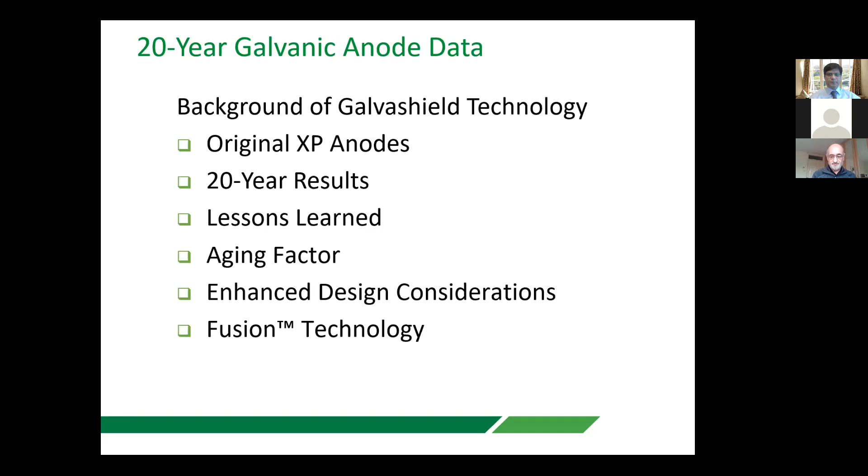So, corrosion prevention is basically to prevent corrosion from initiating, rather than stopping it after it's started. There's no existing criterion for that in the standards, although we've been looking at that. We are actually looking at EN 12696 recently to try and deal with that necessity. But there isn't any standard at the moment.

The only thing that is mentioned in the standard is that the current density necessary to prevent corrosion from initiating is between 0.4 and 2 milliamps per meter squared. And that is much lower than the level required to stop ongoing corrosion activity. And that's more like 2 to 20 milliamps per meter squared. So it's an order of magnitude lower current requirement.

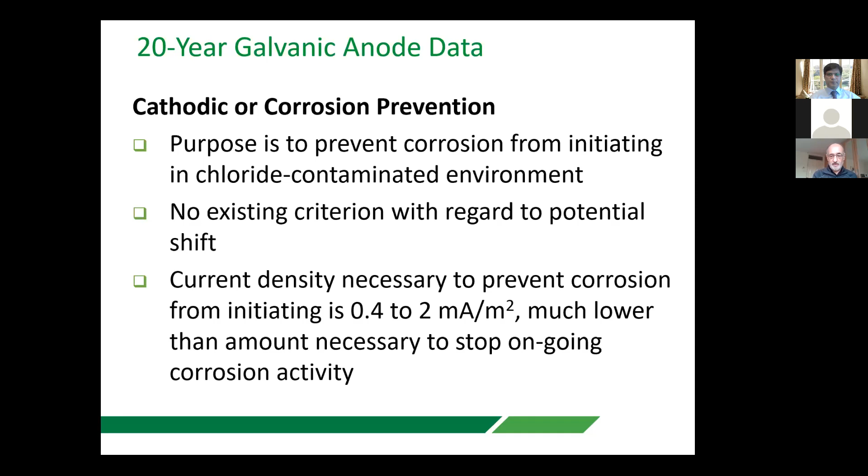Now, why am I talking about corrosion prevention? Well, one of the initial problems that people who are repairing concrete construction were finding was that when they carried out a repair, a patch repair, i.e. remove any cracked concrete, remove contaminated concrete around the steel, that would make a very good repair, and it looked wonderful. But corrosion would initiate at the periphery of the patch repair very quickly. 2 to 5 years later, they would have to come back and repair the adjacent area. And therefore that meant that they were sort of chasing their repairs. You can have one patch repair, then you move along to the next bit and the next bit and the next bit.

Obviously there was a problem. There was something that was happening that wasn't stopping the corrosion close to the patch repair, not in the patch repair itself. And that's the problem that FOSROC came to us with when I was at Aston University, saying, well, we've got an issue with our patch repairs. We think our materials are very good, but a few years down the line, we have to go back and reapply patch repair to adjacent areas.

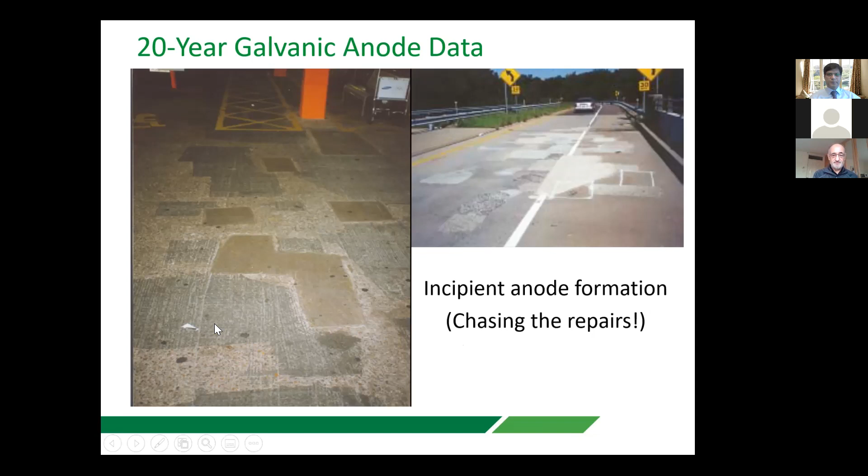And we came up with the solution. Well, first of all, we tried to understand the issue, and what was actually happening was when you carry out a patch repair, you have now forced the steel within the patch repair to become the cathode, being the area that's non-corroding, but drives the anode, being the area that is corroding. So initially, what was within the patch was the anode, and therefore the corroding region. So steel was corroding. We now fixed that. We forced it to become a cathode, I beg your pardon, which means that any slight contamination of the periphery, of chlorides perhaps, or carbonation, or a change in pH in the concrete, would force the surrounding steel to become anodic and therefore start to corrode. And that was basically the principle.

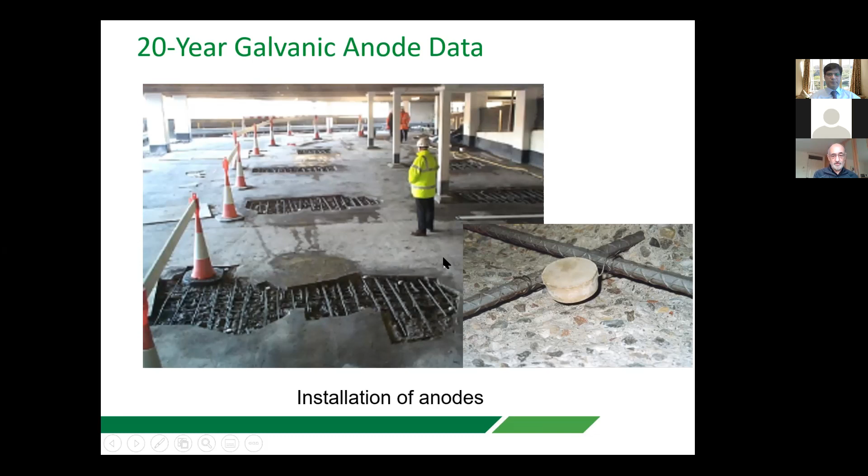It's now called the ring effect. It's been known for many, many years. And our solution was to attach this type of anodes around the periphery in order to maintain that region inside the patch repair as cathodic. So the anodic areas are now these little anodes. They're the bits that are corroding sacrificially, and they protect the surrounding region, particularly the periphery of the patch repair.

But there had to be a bit of development to try and convince the zinc that we were using as the core material. Zinc is obviously more electronegative than steel, and therefore will preferentially corrode if you couple it with steel. But the zinc needs to remain in an active condition. If you put zinc inside concrete at pH 12.5 or roughly that, you would see that it would start to passivate. It would form calcium zincate byproducts. And that would act as sort of a passivation layer on top of the zinc, and soon the corrosion of zinc would stop, and therefore you're not really protecting the steel reinforcement.

So we had to encase it in a cementitious material that will maintain the activity of the zinc. And the way we achieve that is to include a saturated amount of lithium hydroxide, i.e. lithium hydroxide powder mixed into the cementitious material that will maintain the pH well above 14, and it will keep it at a constant pH because it's a saturated solution. It means that it acts like a buffer, and therefore that will continually maintain the activity of the zinc product.

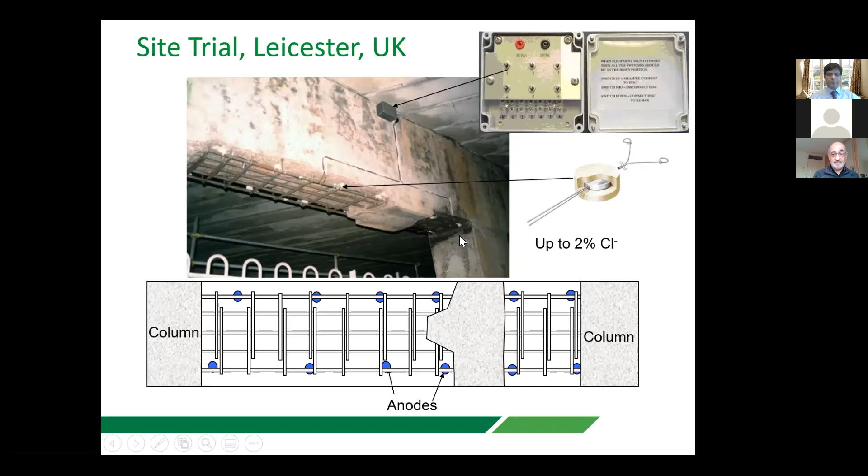and it was a typical patch repair in a bridge in Leicester in the UK. We removed 2 adjacent areas. We removed the cover concrete, exposed the steel that was corroding, and then attached 8 anodes around this area and 4 anodes around this area. As you notice, it's at the periphery of the patch.

But instead of connecting the anodes directly to the steel reinforcement, we took the connection into a junction box, connected the junction box to the steel reinforcement, and therefore we were able to turn on and off the galvanic anodes. That allowed us to measure the current that flowed between each individual anode and the steel. It also allowed us to turn off the system for 24 hours and watch how depolarization would develop over the time, and also look at the depolarized potential 24 hours after disconnection.

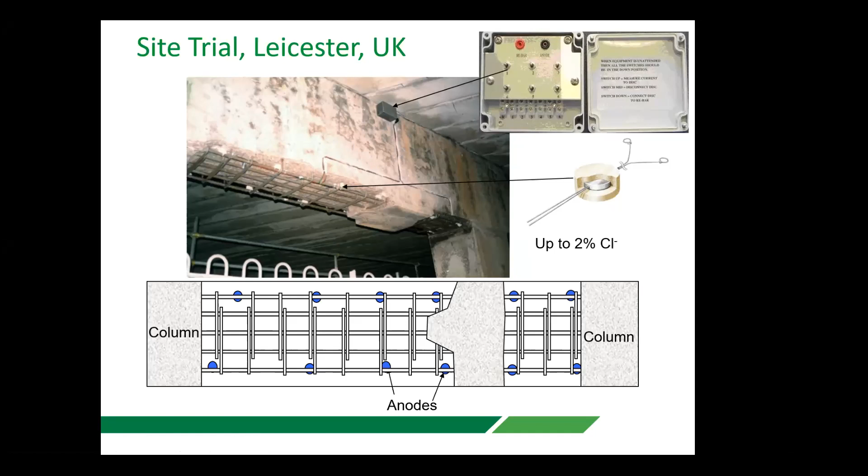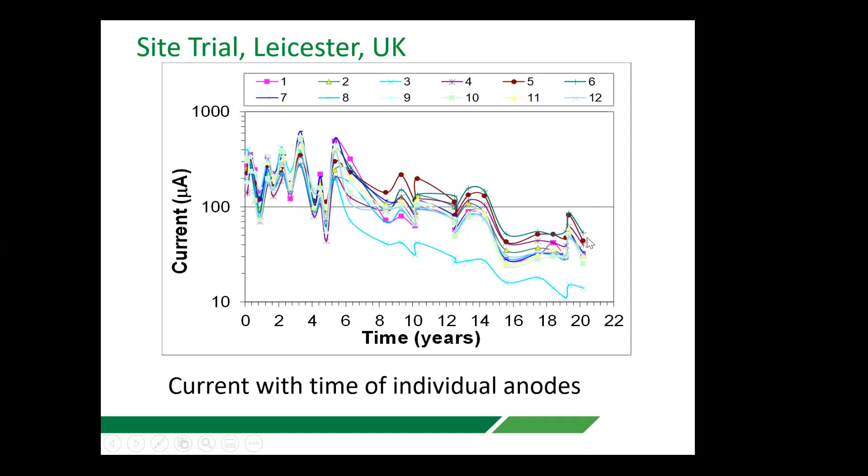And this is essentially the current output that we saw over the years of each individual anode. 12 anodes there. You can see that one of these is not particularly happy, but all the others are more or less diminishing in intensity with time. We looked at how much zinc we actually consumed over the time period. We did that both ways. I measured the amount of charge that was delivered by the individual anodes, used an efficiency factor of about 70%, and determined how much zinc was consumed using the Faraday equation. And we saw that after 20 years, we roughly used about 60% of the zinc within the individual anode.

You can see number 3, which is the one that was struggling. Then at 10 years, we actually took out some of the anodes, not in fact the ones within the monitored area, but there were adjacent patch areas that we installed at the same time. We took one anode out to have a look and see how it was consumed. And we could see that the consumption was relatively smooth. You lost zinc. That was the original zinc outline. The space between that was

evacuated, if you like, by the zinc product, and was filled with corrosion products, primarily of zinc oxide. But we also noticed that the zinc oxide was able to migrate into the pore structure of the cementitious material, quite a long distance, particularly on this side where you had more of the corrosion, quite a distance into the encasing mortar. And that was what was actually being hoped for, because we know that zinc in a very high alkali environment, when it corrodes, the corrosion products remain soluble. They're zincate ions, and they're able to migrate within the pore structure. They then obviously, when supersaturation is exceeded, precipitate out as zinc oxide.

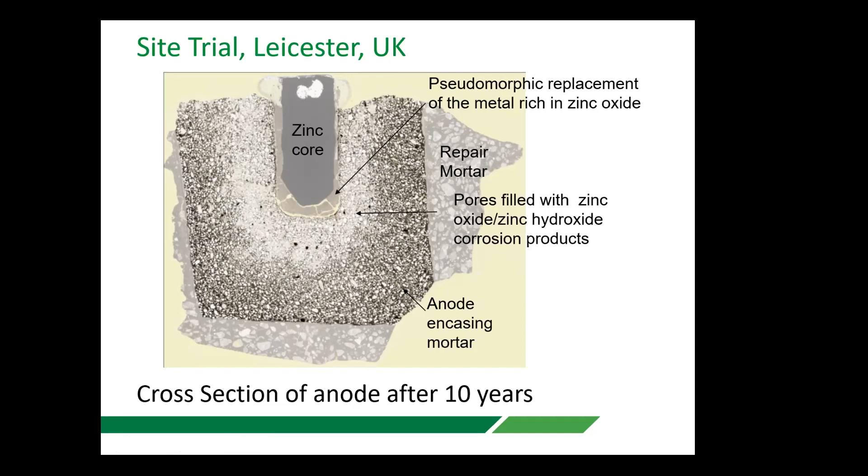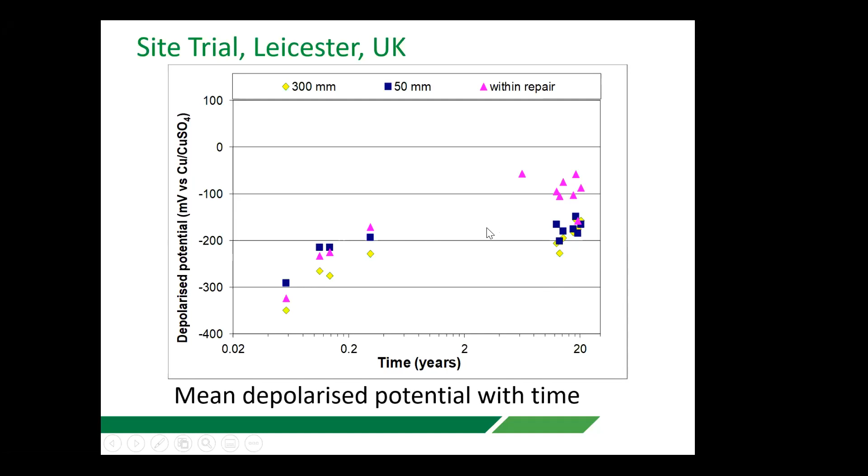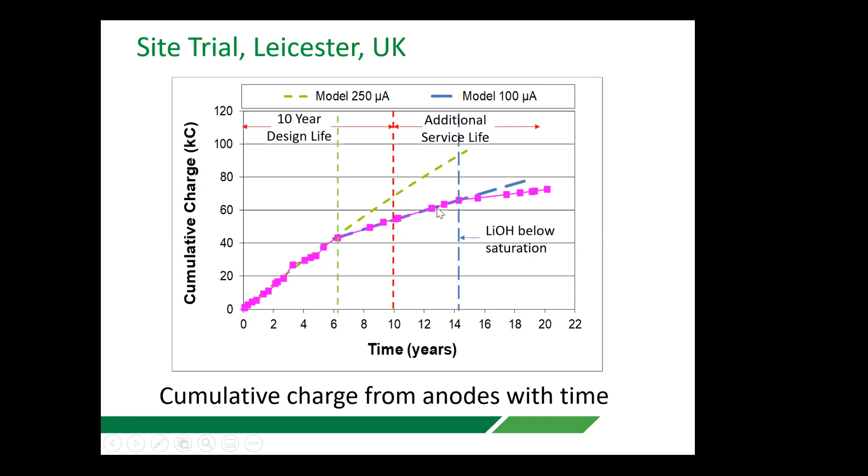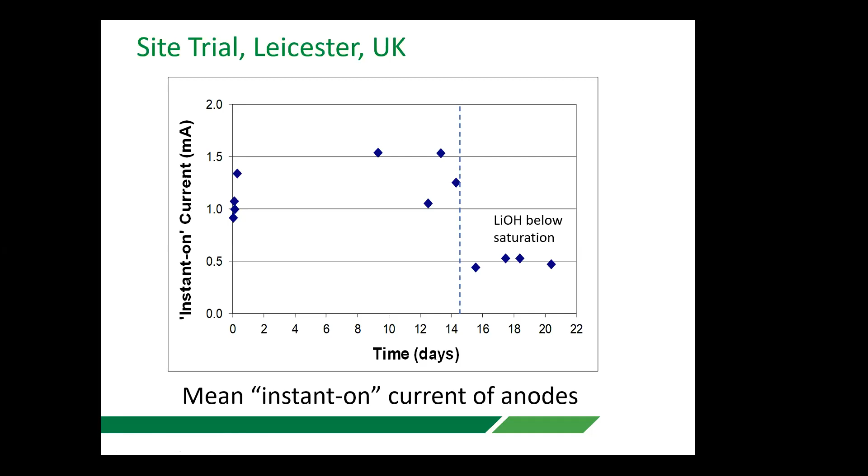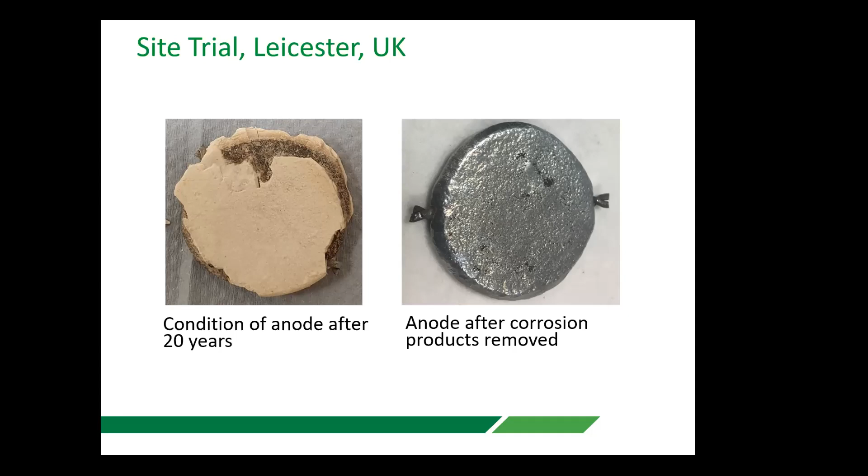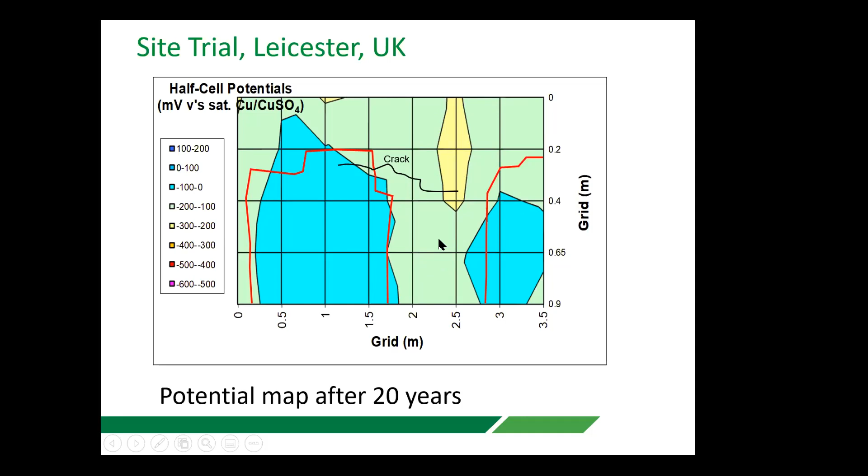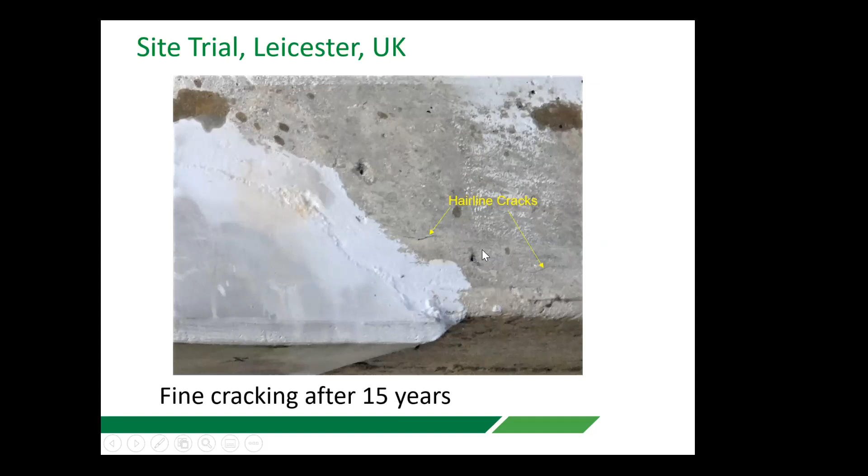Looking at it at 15 years, we could see that there was a sort of hairline crack that was just beginning to develop. This is the one patch area, the other one is over here. So the crack was actually developing. So at that time, at about 15 years, we were not producing enough current to control the corrosion in that region. And that eventually became thicker at 20 years. And we could actually see that very clearly and moved into the patch repair. So up to 15 years, we could claim that we were able to maintain the patch repair in a good condition that did not require anything further. Now we're in a position where we need to go back and do something to that patch repair.

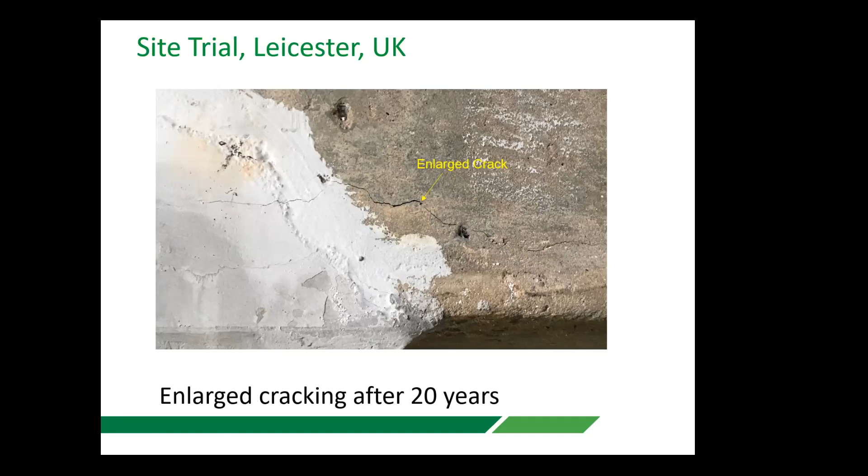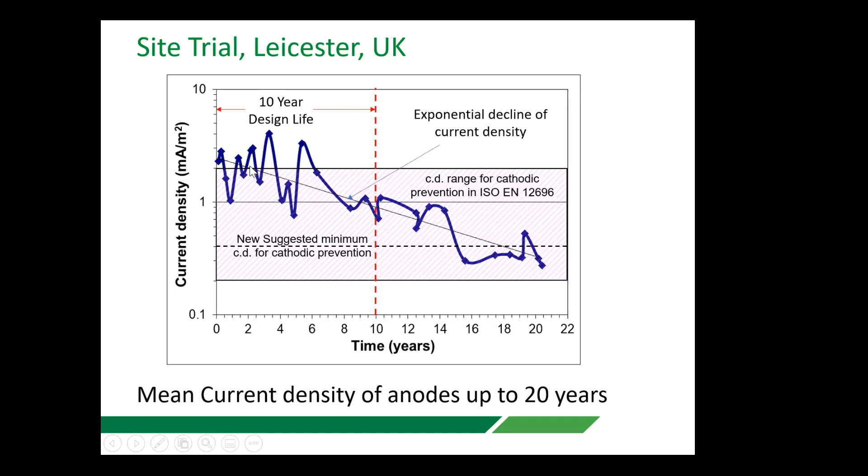And if we look at the mean current density over that period of time, you could see that at 20 years, it's dropped considerably. But nonetheless, we could see that if we plotted on a logarithmic scale, the decrease in the current was actually exponential. So you had basically a straight line relationship. And we could predict from that, well, we could determine, if you like, an aging factor. The aging factor being how quickly the current halves from its original value. So in this case, we saw that at 7 years, it roughly halved, and 7 years more, it halved again, and so on. So there's an exponential decline of current density, consistent with the half-life principle. That makes things quite easy in consideration, because you can then try to design accordingly.

Now, what else did we learn? The current density on this occasion halved every 7 years, and we term that the aging factor. So you obviously want to be achieving a higher aging factor than 7 years. Humidity and particularly temperature modify the current output significantly. And you would have noticed that the current was not totally exponential, but it went up and down depending on whether it was summer or winter.

Now, since then, we've had a look at about 12 or 13 other situations. This first one is the one that I talked about in detail. We had an aging factor of 6.9 years. The spacing of the anodes, i.e. the distance between the centers of each anode, was 600 millimeters. On an adjacent one, the same place, but in a column, the spacing was 750 millimeters, even wider. And we only achieved an aging factor of just over 4 years in that case.

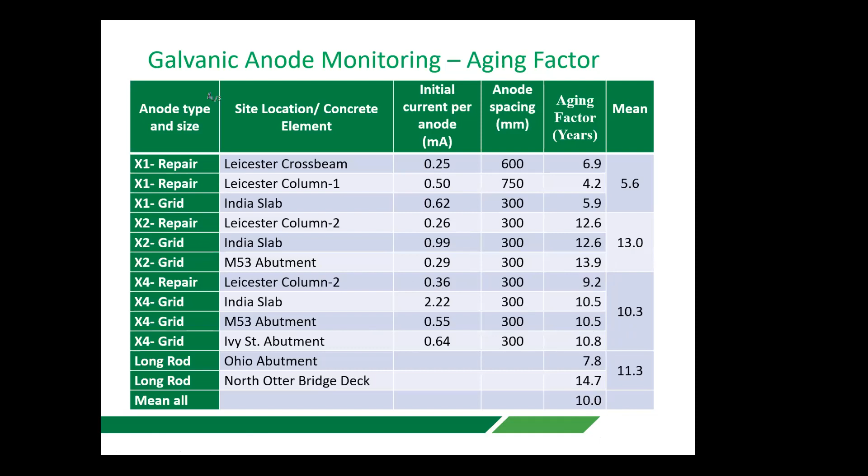Now, when I looked around in the literature to see how other anodes, remember these are alkali activated anodes, there are halide activated anodes, chloride, bromide, and such. I could only find 2 examples of results that were published, and I determined the equivalent aging factor of those. I couldn't find anything beyond 3 years, so there's a clear difference between alkali activated anodes, which allow the corrosion products to migrate, and the chloride activated or halide activated anodes. Again, they use zinc, but what happens is zinc corrosion products are not soluble because the pH is quite low, and that tends to accumulate very quickly around the zinc mortar interface. That subsequently reduces the current flow.

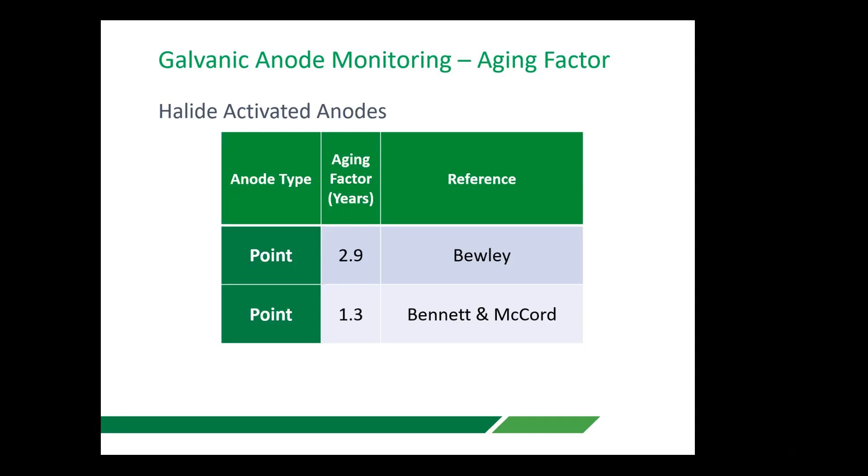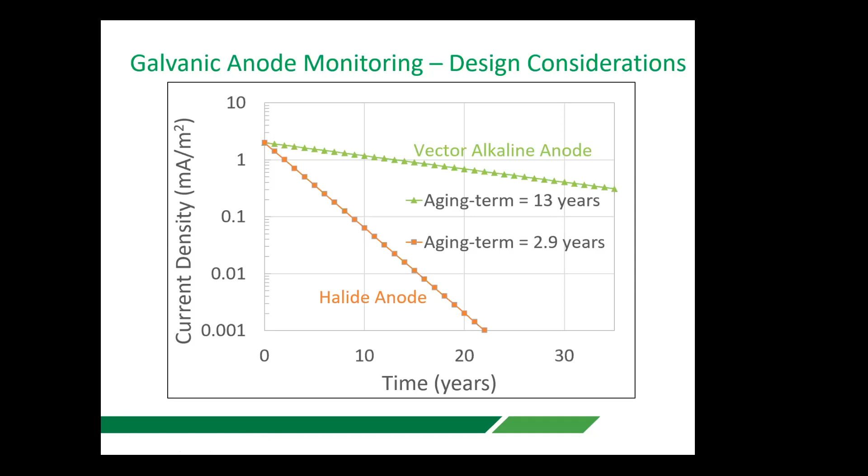And just to highlight how that aging factor can now be used, it gives us a lot more confidence in predicting where we want to be. So if, for example, we're looking for a current density of around, say, 0.4 milliamps per meter squared after 30 years, we know by using the aging factor that we need to start at around 2 milliamps per meter squared. Now, if you use the alternative halide anodes and start at 2 milliamps per meter squared, you'll see that the current output would diminish so quickly that you're hardly producing any current even after 15 years.

And just to show it in a slightly different way, if our objective is to maintain a current density of 0.4 after 30 years, as I said, we need to start at around 2 milliamps per meter squared for the alkaline anodes, but well over 10,000 for the halide activated. That obviously is an impossibility.

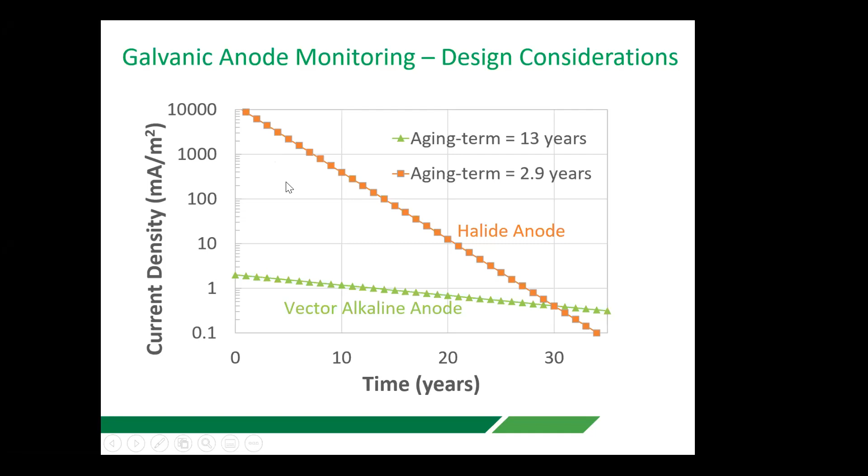So just a summary: the service life of existing galvanic anodes is expected to be at least 15 years and possibly 20 to 30 years. We're more confident that we can get to 30 years now with new technologies and the improvements that were made to the anodes from learning from our mistakes, if you like, or understanding the behavior of anodes. Current output of galvanic anodes is sustained for many years with a gradual exponential drop at a measured rate. And that measured rate we are now calling the aging factor. So the higher the aging factor, the better the performance of the anode.

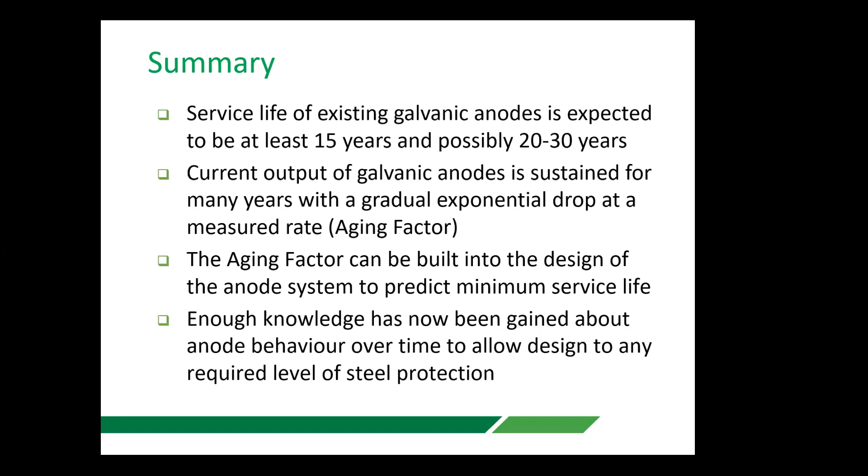And the aging factor can be built into the design of the anode system to predict minimum service life. And enough knowledge has now been gained about anode behavior over time to allow design to any required level of steel protection. So just by knowing how your anode would diminish its response or its current output over years, you can, as I showed in the examples, say, well, if I need a current density of X at year 30, then this is the current density that I need to start at.

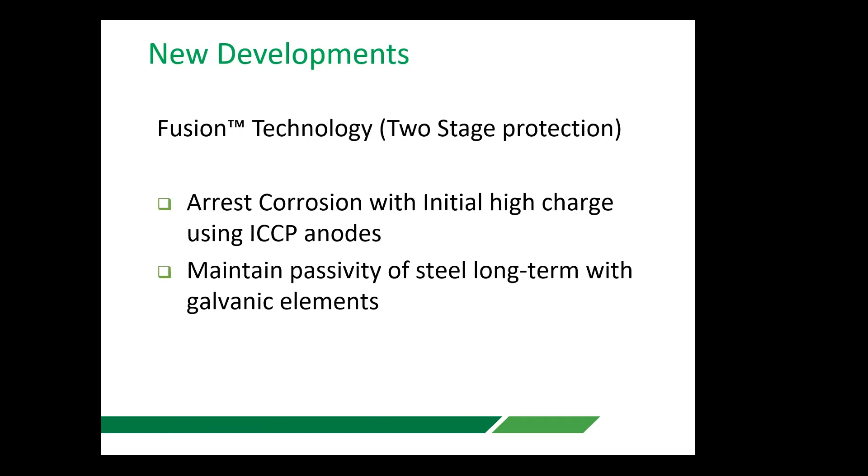Okay, so going on to new developments, and this is what we now call the fusion technology. It's a two-stage protection. Now, the one stage is obviously the galvanic protection that we've now almost perfected and we understand very well. But we wanted to have an impressed current element at the beginning. And the main reason for that was to try and stop corrosion. So if we are able to arrest corrosion with an initial high charge using the ICCP anodes, we can then maintain that passivity of the steel just by using a lower current density, which I mentioned at the beginning, called cathodic prevention. So an order of magnitude lower current density, and that can easily be achieved by the galvanic anodes. Just as I said, maintain the passivity of the steel long-term by using galvanic anodes.

So what was the background to that development? Well, we know that when we apply polarisation to the steel, i.e. cathodic protection, and the chloride ions being negative and the steel being also negative, they start to move away from the steel. Chlorides are the main corrosive element, if you like, when we come to steel reinforced concrete. Equally, we start producing hydroxyl ions at the steel surface because of the cathodic reaction. As long as you have oxygen and water, you will produce hydroxyl ions. So that hydroxyl ions would increase the alkalinity around the steel reinforcement.

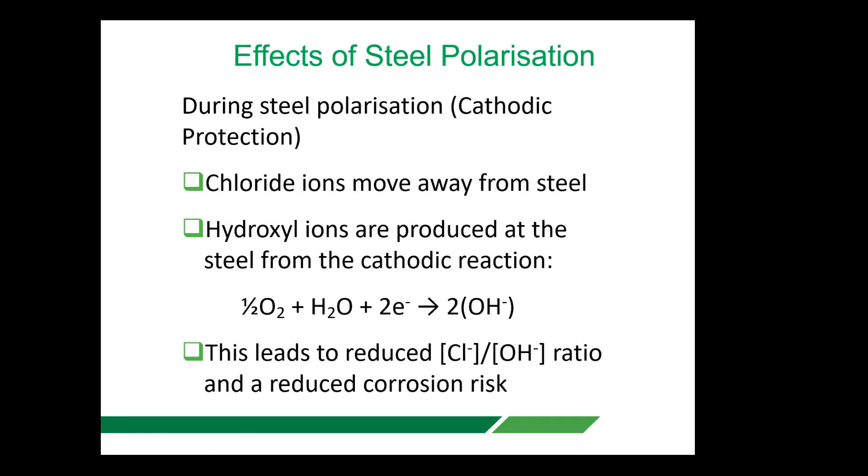And that total result is that you are continuously reducing the chloride to hydroxide ratio, and therefore the corrosion risk of the steel reinforcement. There is actually a critical chloride to hydroxide ratio below which there's no more corrosion. So the attempt really is to try and reduce the chloride to hydroxide ratio fairly early on in the application of cathodic protection to be able then to switch over to cathodic prevention. And we've seen that in the lab when we looked at ionic concentrations when we applied current.

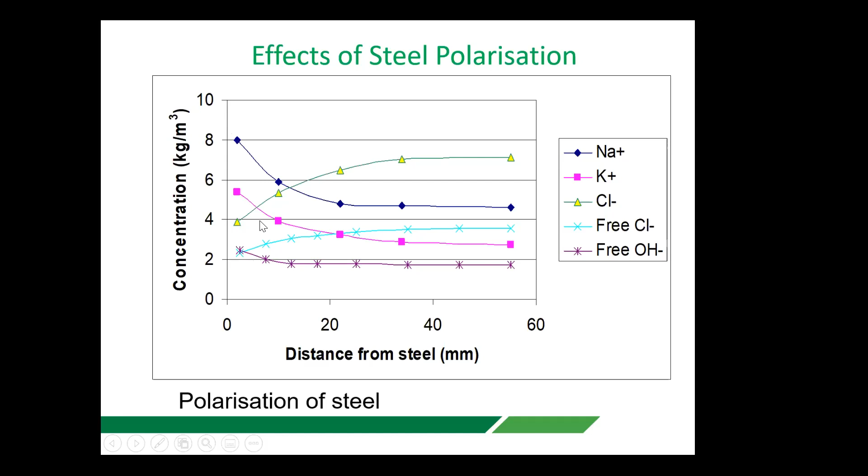This is perhaps a slightly exaggerated one. We had a current density of, I think, about 50 milliamps per meter squared. But you can see that demonstrates clearly what happens to the ionic concentration at the steel surface. This is the bulk of the concrete. This is the steel surface. And we can see that we are attracting sodium potassium ions towards the steel. We are repelling the chloride ions away, and we are producing hydroxyl ions. The result is that you are increasing your sodium potassium hydroxide concentrations around the steel reinforcement.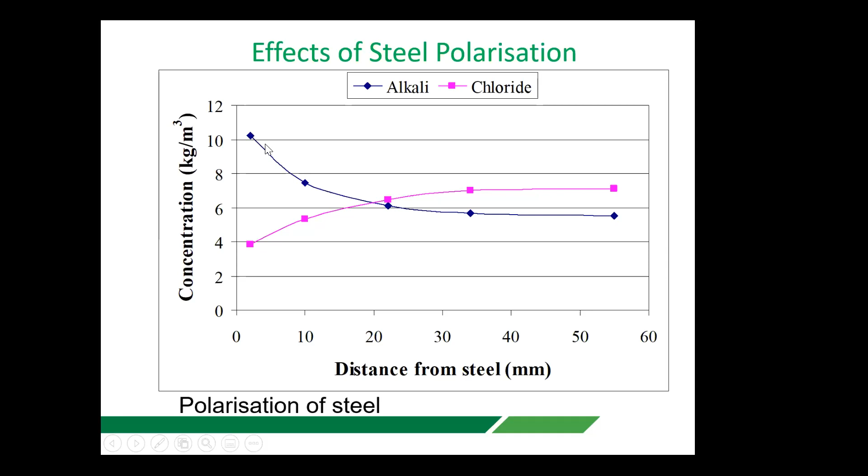And just as a sort of summary slide to show the total alkali amount that you induce around the steel reinforcement when you apply this negative current to the steel, and that you are reducing the chloride concentration. Therefore, the chloride to hydroxide ratio has reduced significantly compared to where it was at the beginning. What we also found was that if we induce a current to the steel reinforcement, the amount of alkali increase was actually dependent on the current density that we were applying. So at very high current levels, we were getting extremely high alkali concentrations. But even at a relatively moderate 20 milliamps per meter squared, which is what we apply normally as the top end of cathodic protection, we were still getting quite a significant increase in alkali. And it's really that alkali increase, the realkalization, if you like, of the acidic areas that have been produced when corrosion has been occurring, that tends to reverse the corrosion process.

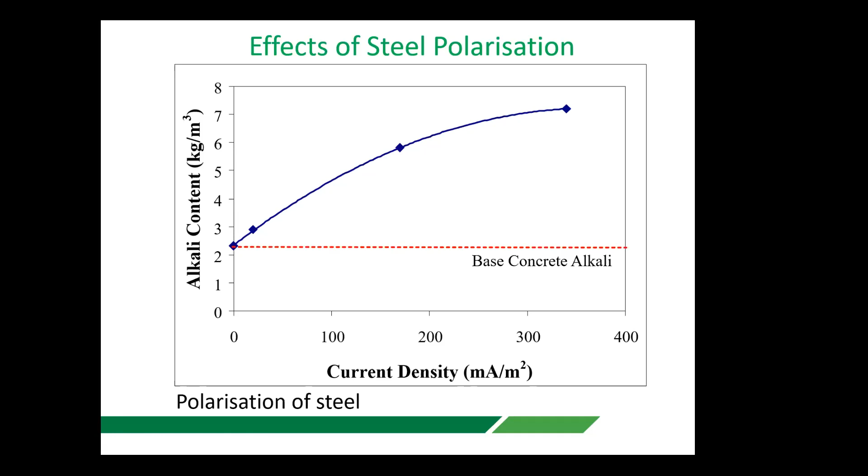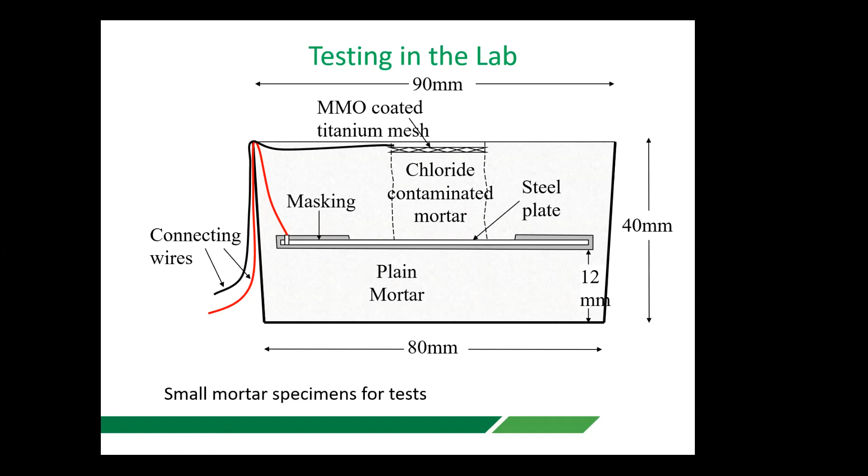So we tried that out in the lab. We made some small specimens, little mortar specimens where we had a steel plate which was masked all around apart from a central ring. And we introduced chloride contaminated mortar in the center of that, away from the edges so that we could avoid crevice corrosion. And we then applied, using a small mesh MMO coated titanium mesh anode, a cathodic current density to the steel reinforcement.

And what we found was that depending on the amount of chloride that we've contaminated the sample with, if we only had 1% chloride, and in fact that's slightly misleading because in the lab it's very difficult to induce corrosion at 1% chloride, although in practice that happens very regularly. In the lab, using small samples, you tend to make them a lot better than what you would make them on site.

Corrosion is very difficult to induce, but nonetheless, within a few days of applying a small current, we were able to stop corrosion, and the steel was passive. At 2%, it took longer, and at 3% chloride, it took longer to repassivate the steel. And this was applying a current density between 20 and 40, 30 milliamps per meter squared, to the steel reinforcement.

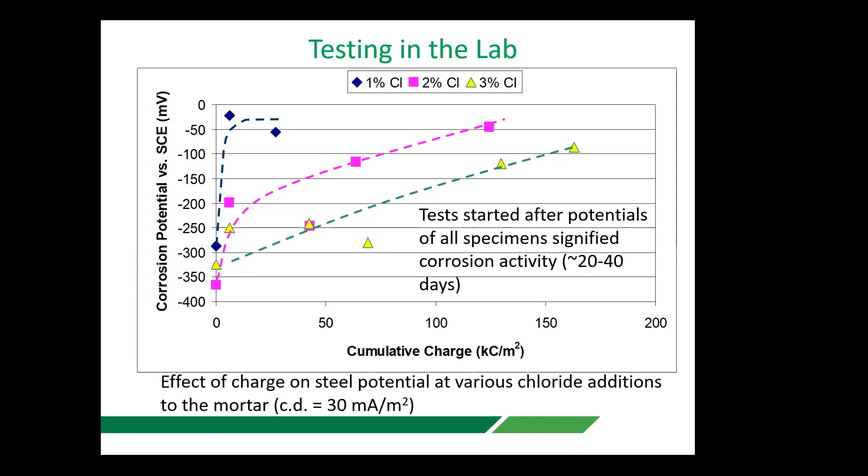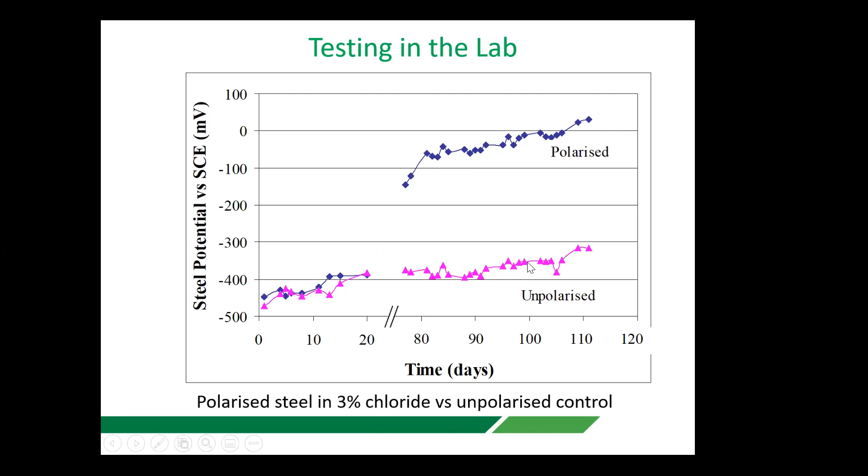Another way to show it really is that if you compare two samples, both of them had 3% chloride in this case. One that hadn't had any current applied to it continued to corrode over a lengthy period, whereas one that was polarized and had 30 milliamps per meter squared current applied to it over a short period of time, then the steel became passive very, very quickly. And that's just another slide showing how, in every case, you were able to induce passivity of the steel reinforcement, even though there was a high corrosion rate at the beginning.

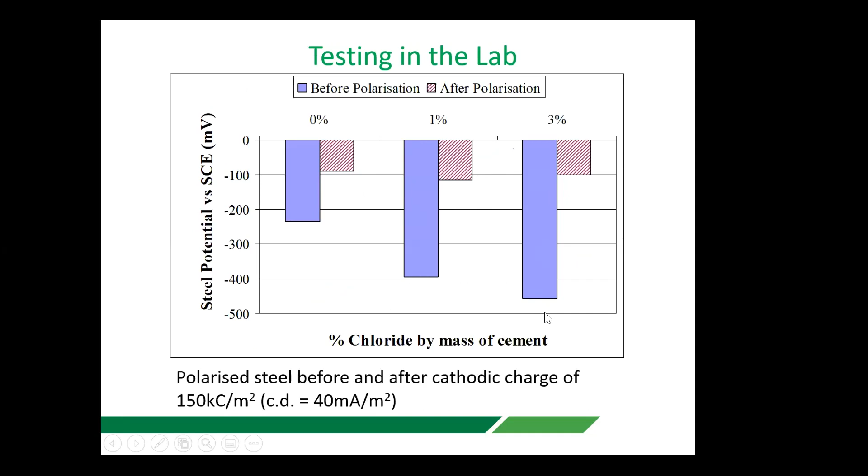Okay, what we found then by extending the experiments was the level of depolarization that was achieved. Now, bear in mind that the standard asks you to maintain a depolarization level of 100 millivolts when you apply a cathodic current, otherwise you're not complying to the standard. Now, we've pre-corroded these samples over 2, 4, or 6 weeks with an anodic current density of 20 milliamps per meter squared. And we also had various levels of chloride, 2% and 4%. The samples had corroded so much that even though we were applying more than double the amount of current density that we would normally apply for normal cathodic protection applications, it took a long while before we could achieve 100 millivolt depolarization. And in some cases, it needed a lot of initial charge to achieve that.

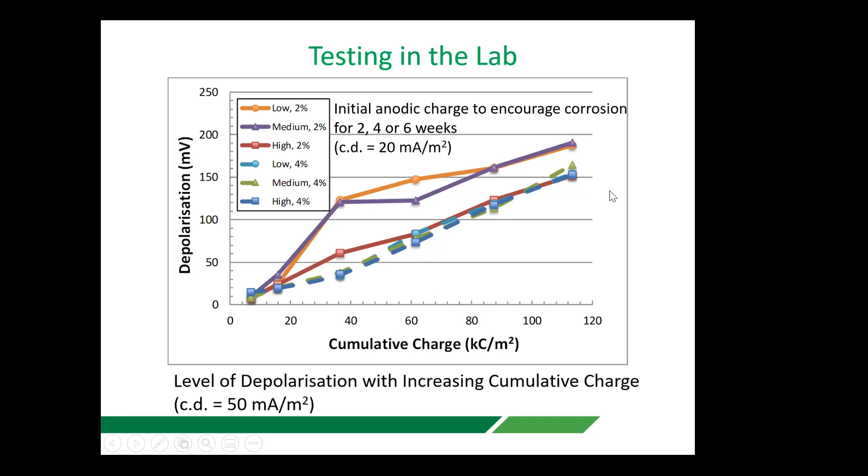But nonetheless, there was a considerable improvement every time, or rather, the higher the charge that we induced onto the steel reinforcement, i.e. the longer the application of the current, the more successful we were with our depolarization potentials, eventually achieving close to 200 millivolts. Similarly, if we have a look at the depolarized potential, i.e. the potential 24 hours after we switched off the applied current, so we allowed them to rest for 24 hours and measured the polarization potential previously, but also the depolarized potential, the rest potential.

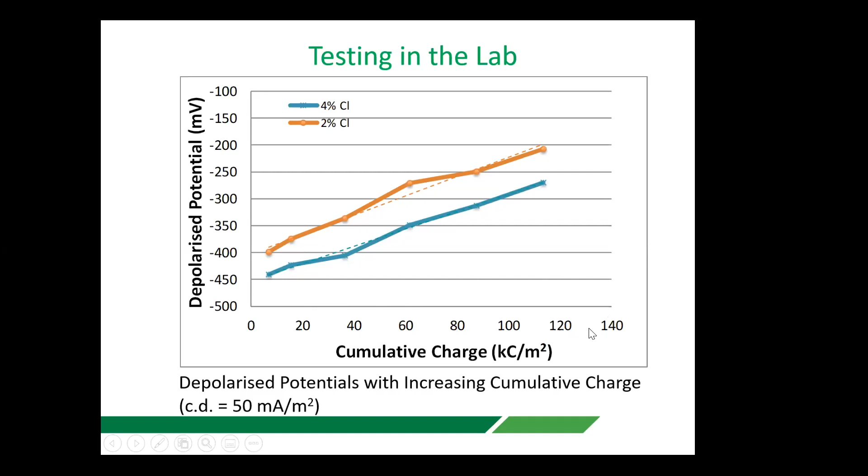We saw that obviously at the beginning the potentials were very, very negative, indicating that the steel was corroding quite a lot. But with time, and it was almost linear, the potential became more and more passive, and moved towards passive regions. And we were able to calculate how much current density we needed, or how much charge delivery we needed to be able to eventually arrest corrosion. And we found that at 50 milliamps per meter squared, for example, at 2% chloride contamination, we were able to do that with just 65 kilocoulombs per meter squared application. Whereas for the same level of pre-corrosion and chloride level, at the lower 30 milliamps per meter squared, we required 120 kilocoulombs per meter squared. So it was easier to passivate if you applied a higher current density.

But of course, 50 milliamps per meter squared tends to get the cathodic protection engineers slightly nervous, because it's considerably above the 20 milliamps per meter squared that appears to be allowed in the standards. So we tended to focus more on the 30 milliamps per meter squared. And if it's over a short period, then that tends to be more acceptable.

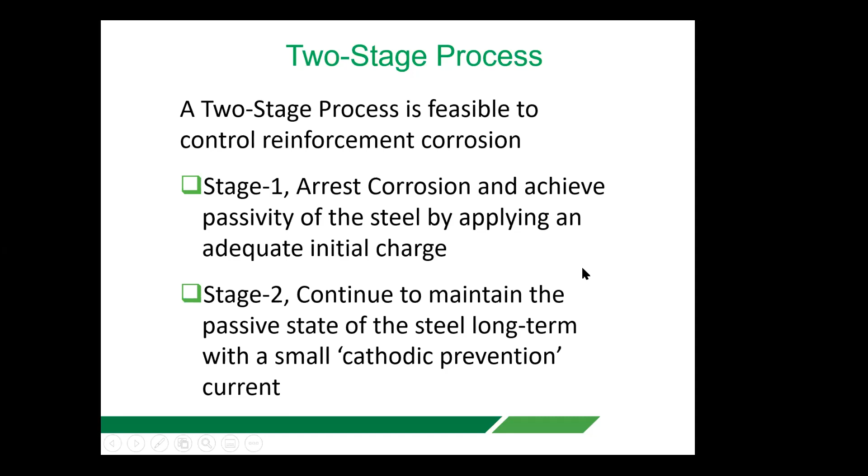Okay, so a two-stage process is feasible to control reinforcement corrosion. Stage one is obviously to arrest corrosion and achieve passivity of the steel by applying an adequate initial charge. And then stage two, where you can continue to maintain the passive state of the steel over the longer term by applying a smaller cathodic prevention type current of between 0.2 and 2 milliamps per meter squared. Okay, so it's basically a diagrammatic representation of the two-stage process.

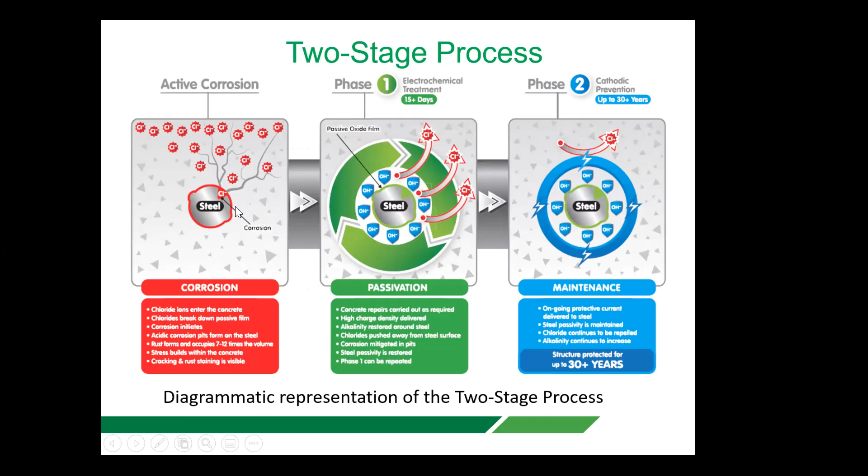Initially, we've got chlorides and we've got corrosion and cracking and so on. If you apply very high current at the beginning, then you're increasing the hydroxyl ions around the steel, which tend to start forming a barrier. The chlorides then move away. And then all you need to do is maintain that barrier using a lower current density. And the chlorides would tend not to get close to the steel because they are charged negatively and the steel is starting

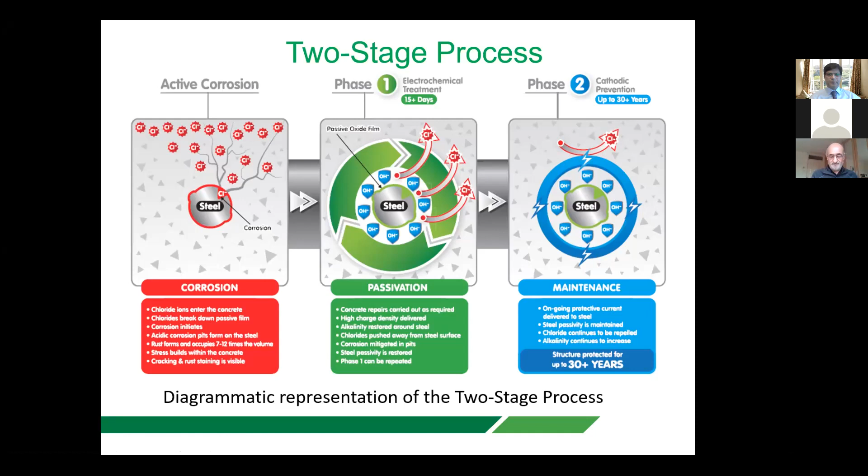We have some sort of control. We have a kind of a diode that's inserted in the circuit, which stops the current being dumped onto the galvanic element early on, but then allows, it's like a valve, if you like, when the battery runs out, the current to pass to the steel through the galvanic element.

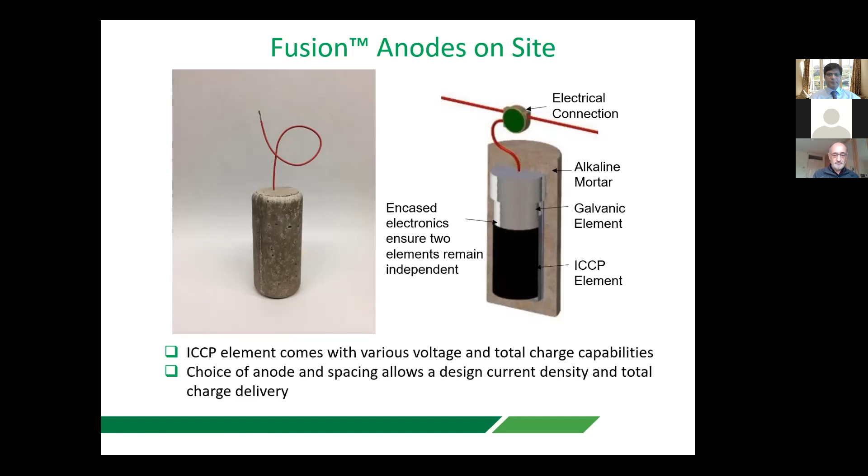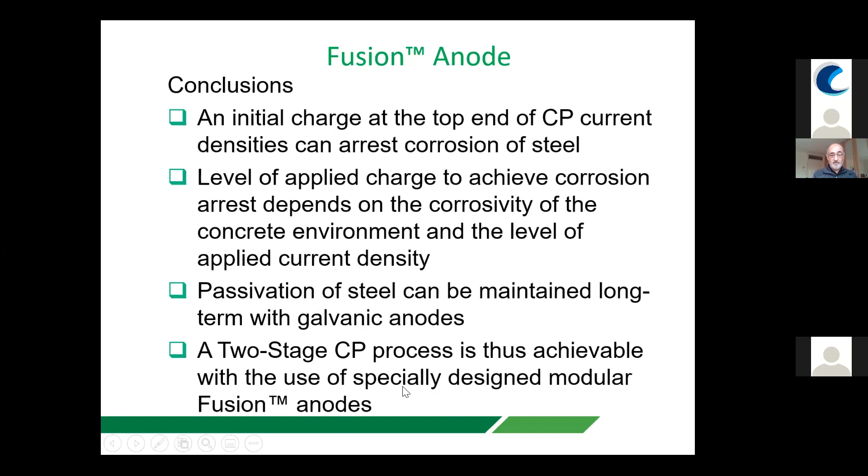The level of applied charge to arrest this corrosion depends on the corrosivity of the concrete environment, i.e. the level of chloride primarily. And subsequently passivation of the steel can be maintained long-term with the galvanic anodes. So a two-stage process is thus achievable with the specially designed modular fusion anodes.

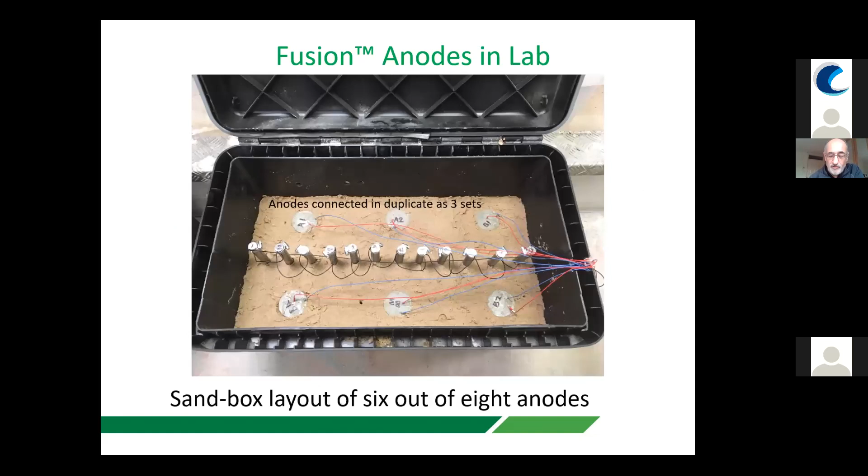Thank you. The second part of the question is, in your impressed current use, showing effects of polarization before the graph showing current density from 0 to 1000 milliampere per square meter, what steel current density did you use? Can I go back to the slides? I'm not quite sure which. Repeat the question again so that I can. In your impressed current use, showing effects of polarization before the graph showing current density from 0 to 1000 milliampere per square meter, what steel current density did you use?

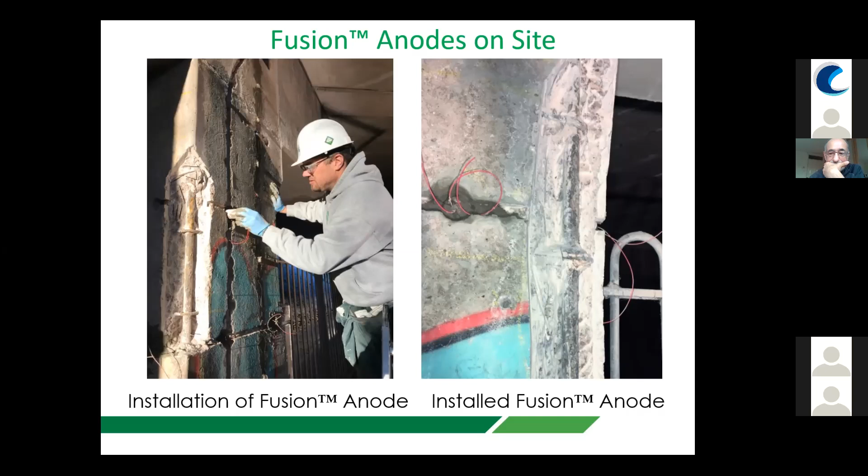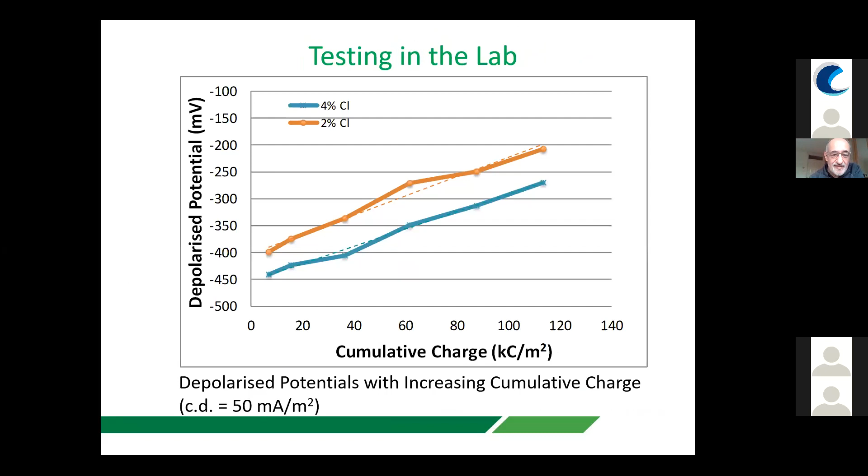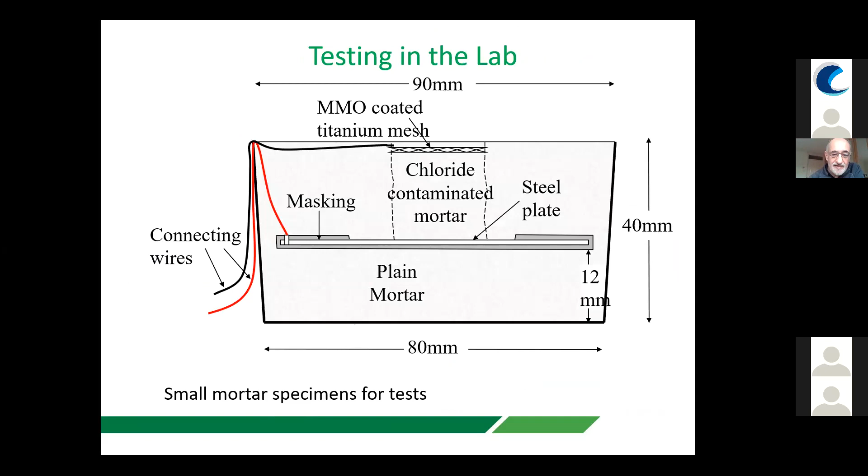And probably if you'll allow me. Yes, permit me to speak. Sorry, George. If you keep going back to your slides, keep going back. I'll ask you when to stop. Keep going back. Right. No, back some more. Right. Back? In this, back. Yes. Okay.

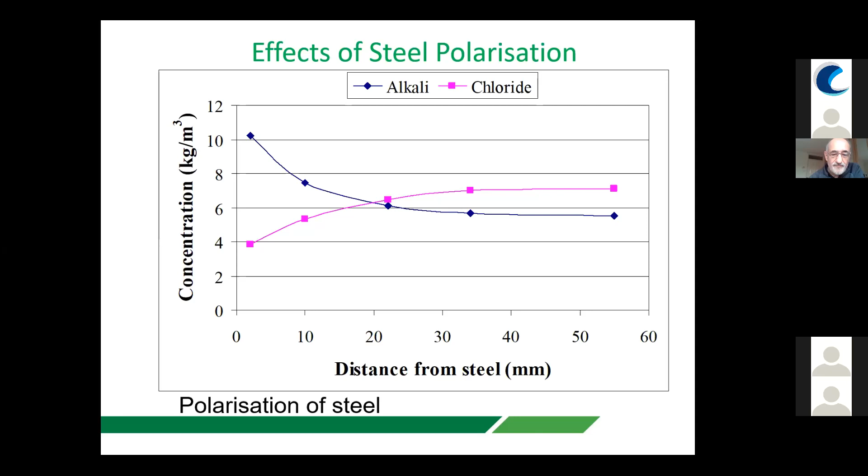So in that graph where you're showing the effects of polarization, and I believe there was one before where you showed a hole, exactly. What steel current densities were they at? Yeah, I believe it was 50 milliamps per meter squared. 50. Thank you. I'm sorry about the complexity of the question. Okay, Brian, can you continue the other sections as well? Yeah, if you don't mind, I'll be happy to do that. Yes, please. And I promise everybody that I've not changed my sex to Linda. It's an IT issue. Right. And you'll know why I'm asking this question, and I hope it'll make you smile.

Could we use your data to inform the minimum charge for chloride extraction? Okay. Chloride extraction is probably slightly different because there you just apply chloride extraction and then you stop. And subsequently what would happen is you would possibly get back diffusion. So unless you use cathodic prevention to try and prevent the chlorides from getting back, the criteria may be slightly different to that. But I think the short answer would be yes, probably yes.

I think there's some really good stuff in here that we could in fact use, and you'll be aware there's a bit of a debate going on at the moment about the criteria for. Yes, correct. Yes, I do. Okay, and just to keep my question as short as possible, I think you may have answered it in one of your earlier answers.